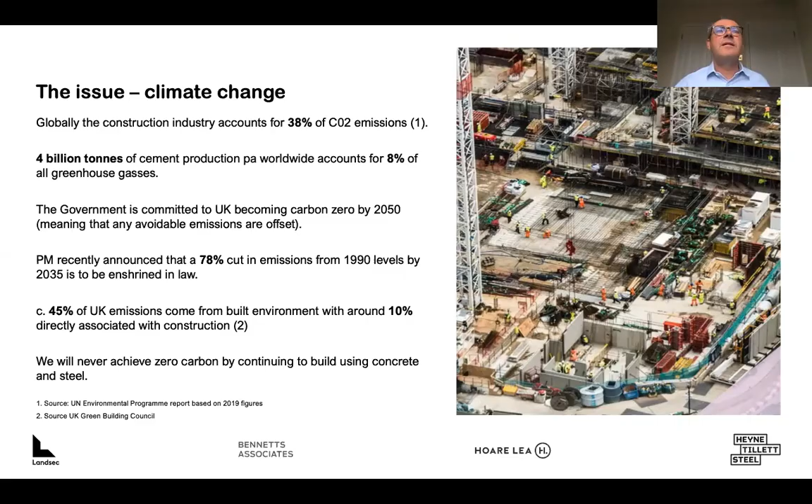Sustainability is already embedded front and centre in our thinking at Landsec. Last year, we refreshed our purpose and core strategy, and underpinning this is our commitment to be sustainable. We understand the issue, and we embarked some time ago on a process to ensure that all our developments will ultimately become net zero carbon in line with the targets we've set ourselves. This is our key focus and links with our other two core purposes: connecting local communities and providing our customers, partners and people with the best platform to realise their full potential. Next slide, please.

Our sustainability strategy is divided into three core areas: creating jobs and opportunities, using natural resources efficiently, and sustainable design and innovation. For each core area, we set ourselves clear and stretching targets. Next slide, please.

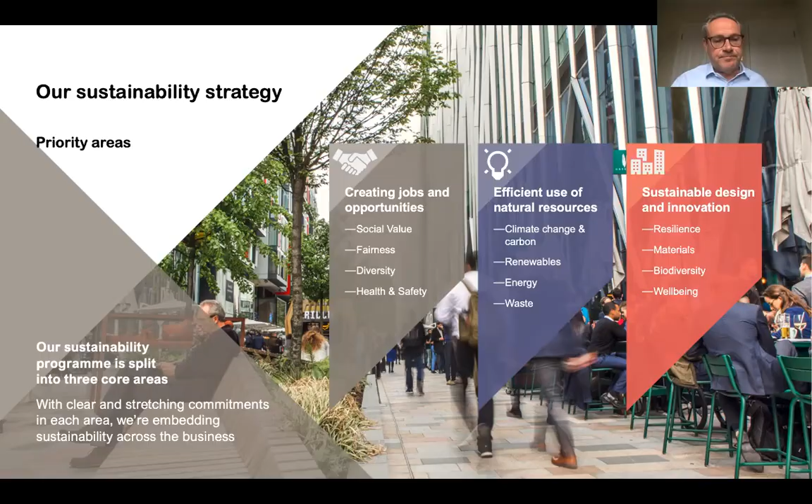Our credentials as a sustainable developer and property owner have become widely recognised. In 2016, we became the first commercial real estate company in the world to set a science-based carbon reduction target, which was to reduce carbon intensity by 40% by 2030. And last year, we achieved this target 11 years early. So we've set ourselves a new target of a 70% reduction from a 2014 baseline by 2030. But whilst we're seen as an industry leader on sustainable development, there's always more that can be done.

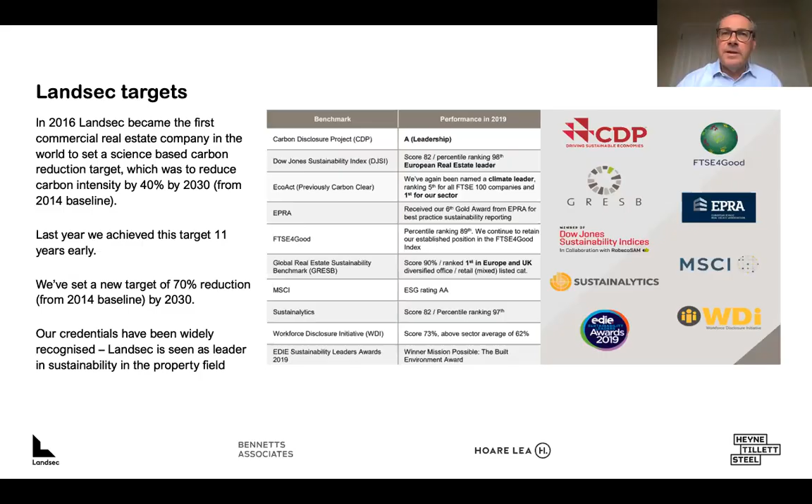Next slide, please. So why are we doing all this? Well, put simply, because the drivers for sustainability are intensifying all the time. And these drivers are from four main quarters. Firstly, investors. Financial institutions are demanding that companies take action on climate change. Between 2012 and 2019, there was a 60% increase in ESG funds, and this is only going to grow going forward. Investors are looking to follow companies that do good as well as make a profit.

In terms of our customers, 126 of our existing customers and many of our potential occupiers have set their own science-based targets or made sustainability commitments, and we need to help them meet these. By offering a building that ticks all the net zero carbon boxes, they'll avoid the need for costly changes to their plans when tighter restrictions come into place. And more directly, a JLL report last year indicated that sustainable buildings command a rental premium of between 6 and 11% across central London, and they also let very much faster.

Overall, in terms of employees, employees want to work for businesses that have the same values as them. 75% of employees interviewed by the Edelman Trust Barometer last year felt that businesses could be a force for good whilst also making a profit. And 2/3 of the public want to buy products that stand by their values.

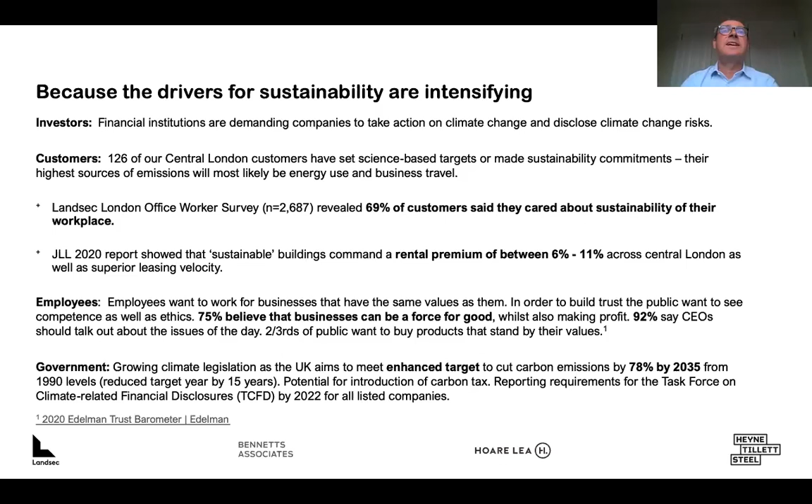Next slide, please. So we've identified 5 key steps to achieve net zero carbon. We aim to reduce operational energy use in our developments, purchase renewable energy, use an internal price of carbon to drive investment towards cleaner alternatives, reduce construction impacts through clever design specification and repositioning our assets, and also to offset remaining carbon for non-renewable energy use.

To implement these steps, we have a sustainability brief, which we give to all our customers across all our developments. Signing up to our sustainability and community charters is a normal part of our process. Next slide, please.

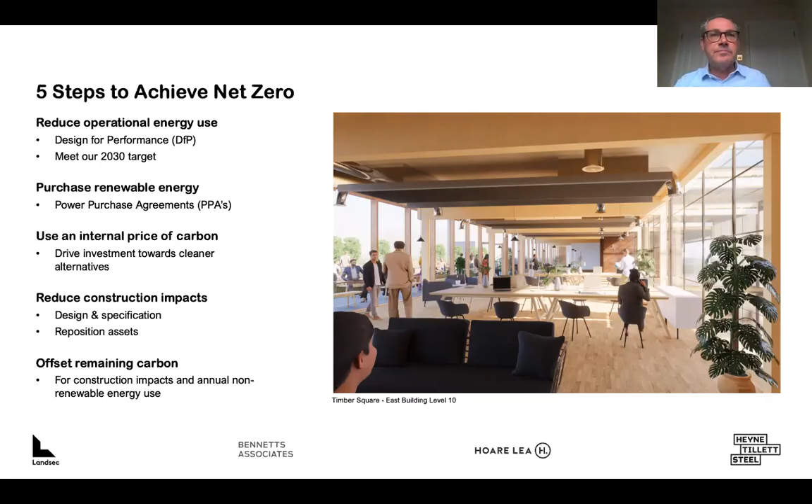So for Timber Square, we selected a professional team who demonstrated a high level of expertise in sustainable design and asked them to come up with a scheme that responded to our net zero carbon aspirations and targets. The brief was focused on 4 main requirements, and these were to minimize embodied carbon from construction by building light and dry, retaining as much of the existing structure as possible, to minimize energy and carbon in operation through specific design of a zero carbon scheme with minimal energy demand, by delivering a human-centric design that embedded natural elements within the scheme and promoted physical activity through the building, and finally to deliver a resilient, lasting design, a strategy and a design that would allow the building to be adaptable to future uses and climates.

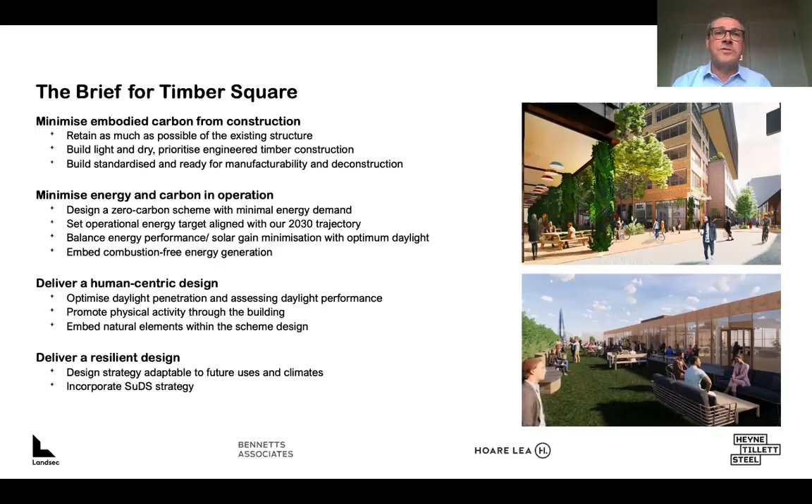Great, thank you very much, Rob. And so now we're going to hear about how the brief has informed the design and how the team has worked collaboratively to focus on a human-centric, low climate impact workplace, as well as a well-connected public realm. And so I'm very pleased to introduce Peter Fisher. He's the director at Bennetts Associates. And of course, Bennetts have been leading the field really in sustainable design since the 1990s. Peter.

Thank you. Next slide, please. Rob has started by outlining the brief, and I have to say, in all of the years that we've been working on projects of this ilk, the brief that we got from Landsec was the best one that we've ever received, and it was the best one because of its simplicity and its clarity. The sustainability brief was actually a single sheet of A4 paper with clear targets on it, and I think importantly, a clear understanding of the ramifications of some of those things.

And I think one of the bits that most excited us was a combination of an emphasis on reuse and timber, and also a line that always stuck in my mind, which was visible and reversible structural joints, which implied to us that Landsec understood what the ramifications of that might be. And Rob has run through the brief that we were given, and I think we took away from that a number of factors on sustainability. I think the key items were around climate action, particularly science-based targets, the resource use and circularity, and an understanding of what that implied, but then also health and well-being.

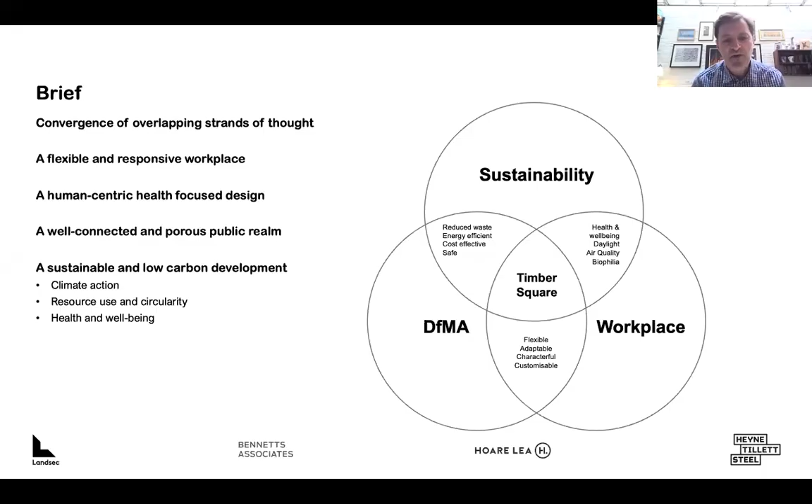And I think the bit that really crystallized for us was a convergence of several different strands of thought around sustainability, the changing nature of the workplace, and also the way that we constructed the project, design for manufacture and assembly. And we're at about 85% DFMA working with Laing O'Rourke. And we were very interested in the intersections between these different facets and how they mutually reinforced and supported each other. The next slide, please.

So just quickly looking at the location, it's in Southwark to the south of the Tate, with the more established Bankside, if you like, to the northern side, and then Union Street and railway arches to the south. So it's quite an interesting area that's overlapping between more vibrant areas and more established ones.

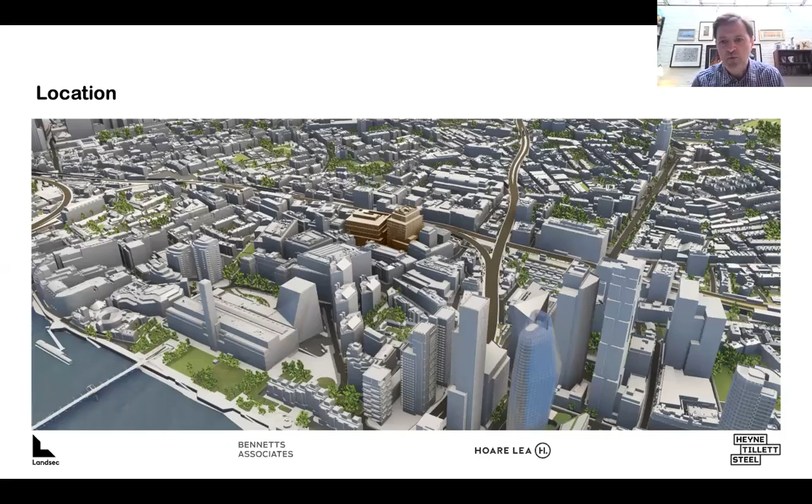And then on the next slide, this just begins to describe some of the very key design moves that were made. And starting from the left-hand side, there's an existing 1950s print works, which is incredibly robust on the site. And we've been able to retain about 85% of the structure of that. So we're removing some areas that are illustrated in pink. Retaining that building and combined with the hybrid structure means that the number of truck movements is almost half what we'd expect with a scheme of this scale ordinarily.

Then the print works is being extended as indicated in blue, and then there is an entirely new building which is slightly taller. The buildings are roughly the same size in scale. And between those, that then creates quite a large area of public realm facing south and against the railway arches. And then one of the most important features, I think, of the building expressively has been roof terraces and balconies. Virtually every floor has access to several roof terraces, and there are 4 major roof terraces, 2 on each building.

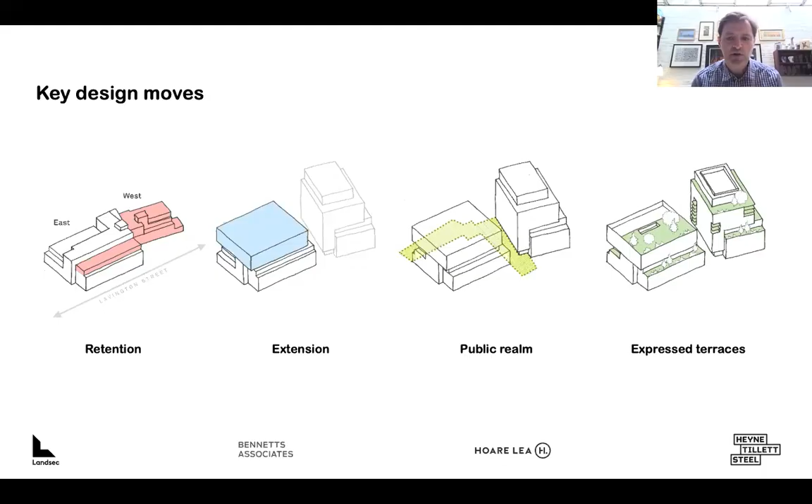And then on the next slide, this is then the images cutting through the 2 main buildings. You can see on the left-hand side the refurbished and extended printworks, and then the entirely new ink building, as it's called. One is an atrium building, which is a virtue of the existing building itself, and then the other building is a centre core. But both of them are built with a timber hybrid structure.

The most important factors, I think, on reducing energy consumption and embodied carbon across the building have been, and Dee and Francis will go into a lot more detail on each of these, but design for performance was extremely important for the project in enabling us to optimize the facade ratios, to have very good daylighting, and that morphs as we move around the building.

And then on embodied carbon, as said, the use of the existing building, the hybrid structure using steel and CLT, but then importantly, I think one of the most important bits has been very, very detailed measurement of that. And the project runs what we've called a carbon VE tracker, which runs along the cost VE tracker. It's done in exactly the same way. So that is tracked all the way through the project at each DTM.

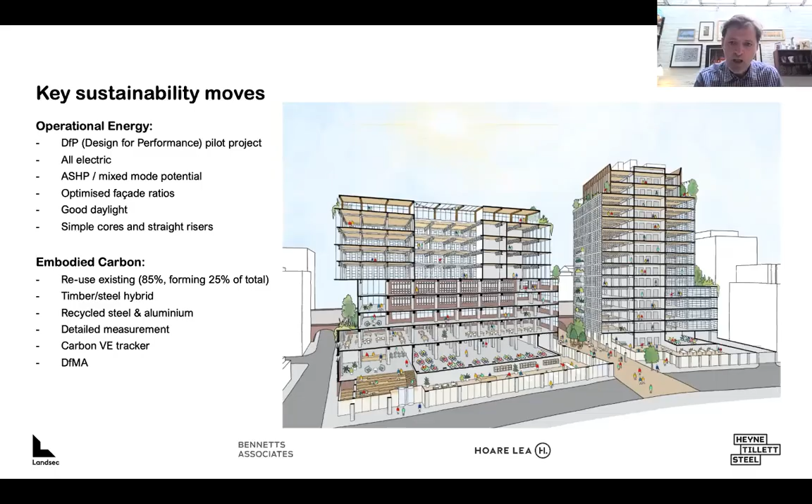And if we move on to the next slide, this is then showing the way in which the DFP model was really used to try and optimize the facade ratios. And these change quite significantly as you move around the building. And it leads to some results that, I think, conventionally are perhaps slightly surprising, in that we have very, very high glazing ratios on the northern portions of the building.

So they're approaching 80%. And then the modular format of the cladding allows us to begin inserting solid, translucent, and even potentially in the future opening lights within each of those areas. And so that morphs as we move around from 80% to 60% on the east and west facades, and then at the upper levels of the south facade that changes to 40%. So it's been very important for us manipulating glazing ratios as we move around. And then if we move on to the next slide, please.

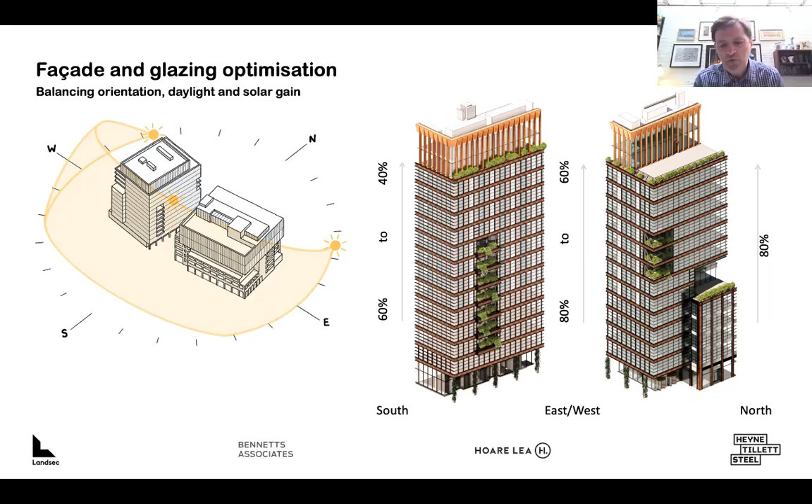This is then beginning to show the structure, which Dee will run through in a lot more detail, but it's broadly the same across the two buildings. The existing building is much deeper plan, so it's got taller floor-to-floor heights and a much lighter weight steel structure. And between them, the two schemes are roughly between 20 and 25% lighter than a more conventional building would be.

And there are no ceilings, it's all exposed surfaces within there. And there's very much been an attitude of materials being self-finished. We're exposing the structure, we're exposing the structure of the cores. So as much as possible, it's been removing material.

And it's surprising things such as suspended ceilings that you would ordinarily have in such buildings. That can be about 10% of the overall embodied carbon of the project. So there's been an emphasis on reused, self-finished and recycled materials and low VOC materials, which leads to a palette a little bit like the one that is indicated here.

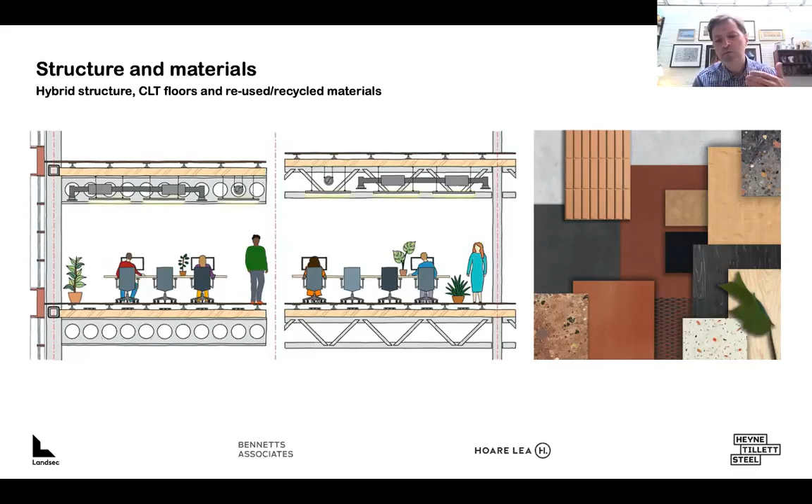And I think if we move on to the next slide, which is then some of the internal views of the project, I think that part of what excites us as architects is not just exceptional carbon accountancy, if you like, and reducing the carbon impact of the building, but that emphasis on reuse, the idiosyncrasies that sometimes come with reuse, and then the range of different spaces that you get, from the image on the top left of this, which is one of the main floor plates with the steel structure and the CLT planks all exposed, to entirely timber structures towards the top of the buildings, and then some of the reuse spaces below.

I think you get a much greater spatial diversity and a material richness, and just an enjoyment that comes out of this that is significantly better than office buildings that were being designed 10 or so years ago.

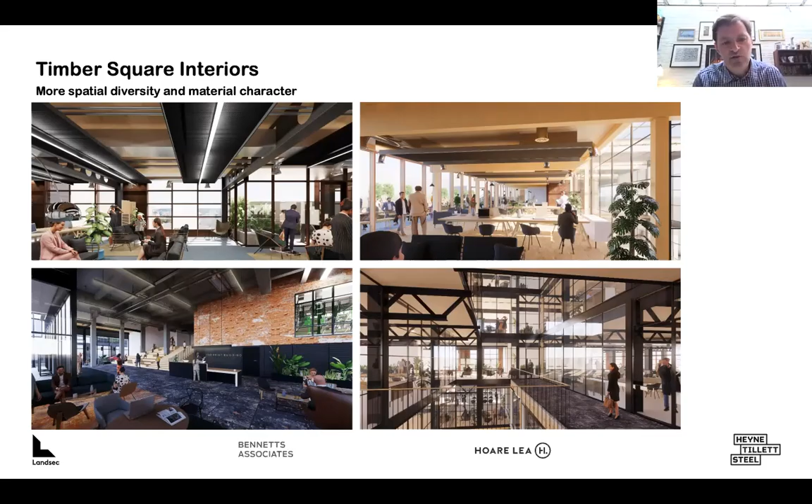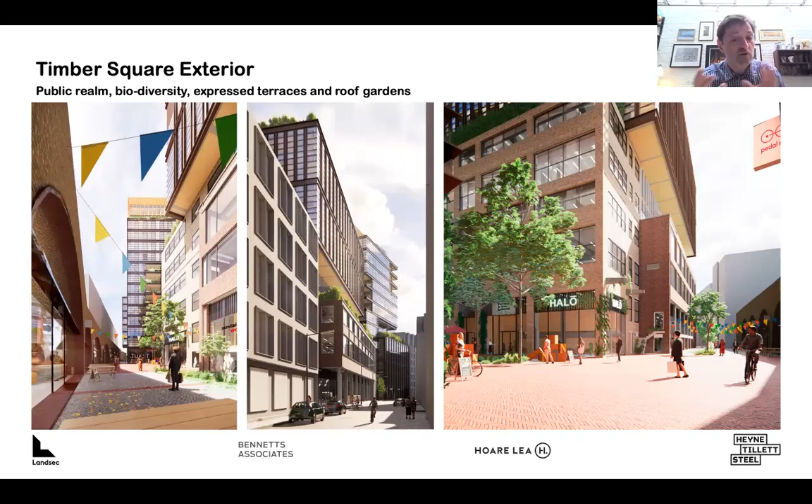And then if we go to the next and the final slide, this is just showing some of the external views of the scheme, the public realm at the lower levels, the railway arches, and then the facades on the new buildings, where it's actually not that easy to detect the way in which the glazing ratios are altering as you move around and up the building, but they are there, and you can also see some of the terraces and the balconies on this.

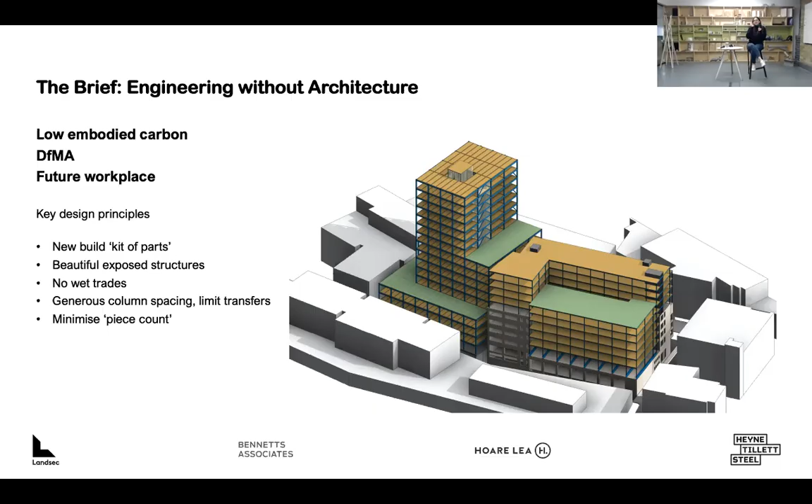And that really influenced our key design principles that we set out at the start for the scheme and our project. The image that's on the screen at the moment was from our first interview with Landsec. And looking back on it, it's really nice to see that a lot of our initial ideas are still in the scheme today. Next slide, please.

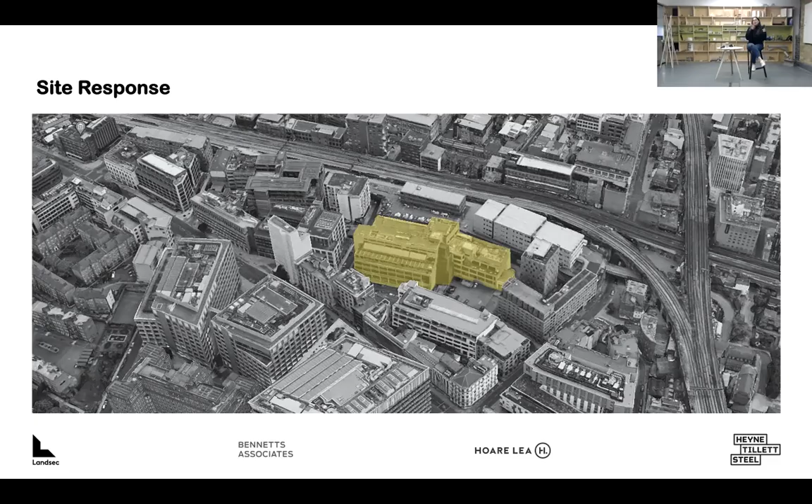So the most sustainable thing to do would obviously be to retain all of the existing buildings on the site. But our initial site appraisal showed that there was one quite small, poor quality building on the site, and one other fantastic building that had a really generous structural grid and great floor to ceiling heights. And that's really where the refurbishment and then new build structure came from. Next slide, please.

So the existing building structural grid is 6 by 12, and we needed to come up with a structural scheme that was going to work with the long spans and also be lightweight to keep the load on the existing structure to a minimum. Concrete was going to be too heavy and also really tricky to modify. And the long spans didn't really suit a glulam structure, as the beams were going to be really large and we were requiring additional transfers. So quite quickly, we honed in on the steel and CLT hybrid solution.

The west building actually really suited the same structural grid as the east. And so we ended up with a really similar kind of structure for both. The 6 meter spans really worked with the efficiencies of the CLT, and the steel suited the long spans.

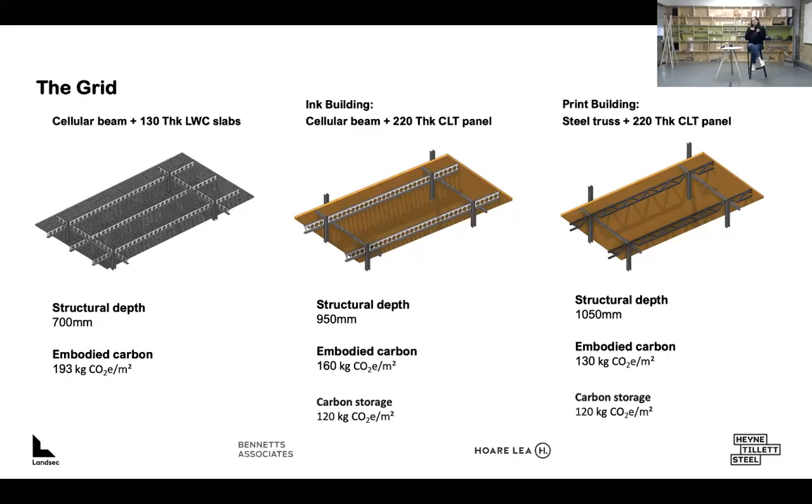Next slide, please. Oh, I should say on that slide, those were the final solutions that we came up with. On the ink building, we ended up with cellular beams, and then on the print, we had slightly deeper, really efficient steel trusses. Next slide, please, Molly.

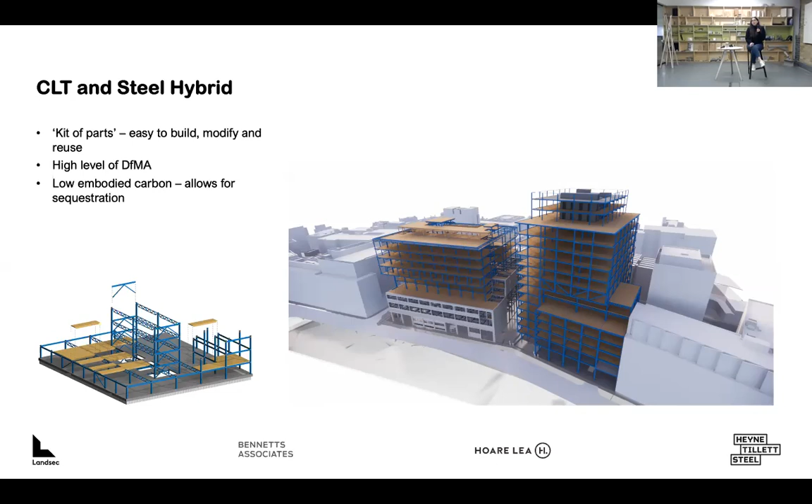Thank you. So the steel and CLT hybrid really kind of met the key design principles that we had set out at the start of the project. It was essentially a kit of parts which was easy to build, modify, and reuse. It offered really high levels of DFMA, and it had a low embodied carbon, particularly when compared to a traditional composite structure, which we were using for our benchmarking. Next slide, please.

So like any refurbishment project, at the start, it's really important to thoroughly research and investigate the existing building to build up a detailed understanding of the structure. We were able to prove that the existing building had been designed for really high imposed loads, and we were kind of able to influence the design of the new superstructure and grid to really work with the existing structure and minimize the amount of strengthening to the frame and foundations.

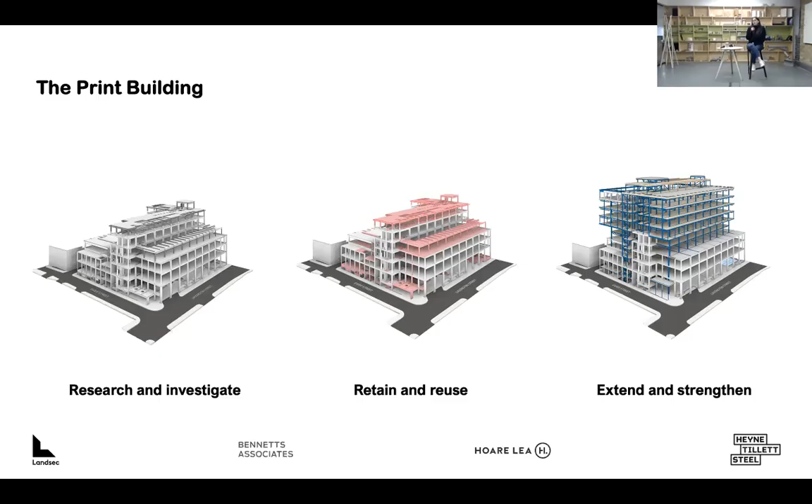The approach to the print building has really been, as Peter said, to retain and reuse as much of the structure as possible. And we've actually been able to keep over 85% of the floor plates, which is very good. By limiting the amount of significant alterations to the lower floors and retaining as much structure as possible, the print building has ended up with a really low embodied carbon rate. And that's really helped to offset the much higher cost of the ink building when we're looking at the development as a whole. Next slide, please.

So I think we all know that to be really sustainable, you want to avoid a new basement. And we did look at that initially on the ink building, but it was not going to be viable. So instead, we tried to make sure that the substructure design was as efficient as possible. The good ground was at a depth of a double height basement. So the basement was set at that level, and we used a piled raft solution, which really minimized the amount of piles that were needed.

Early stages, we looked at a lot of different options for the stability on the ink building. And we did start out with steel perimeter bracing, which allowed a soft core to be used and really offered a lot of flexibility. But as the design progressed, we moved towards a concrete core. And this is now going to be formed in twin wall to really maximize DFMA.

Early contractor involvement was really beneficial on the project, and understanding how the steelwork was going to be procured really allowed us to target VE opportunities for the steel frame. Working with the fabricator, we actually identified that there was 320 tons of BOF steelwork, which has a higher embodied carbon rate than EAF steelwork. So reducing that and working on other VE opportunities on the steel frame, we actually reduced the embodied carbon of the steel by 750 tons on the ink building alone.

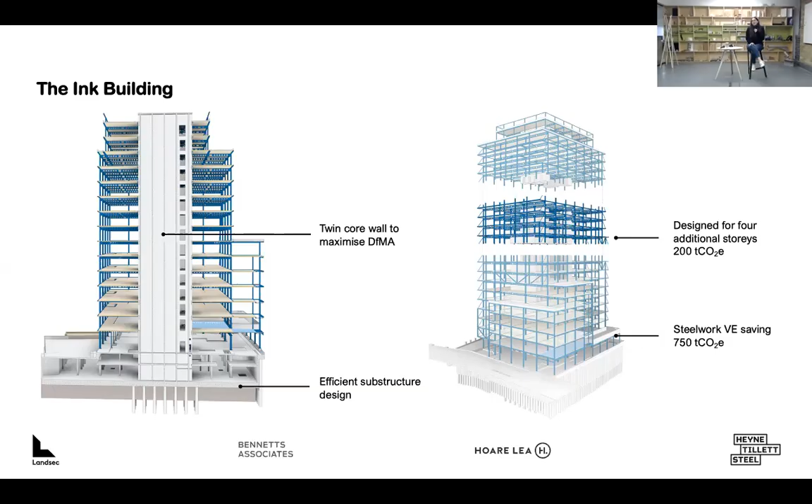The ink building has been designed for 4 additional stories. That's come at a cost of 200 tons of carbon, but offers a lot of future flexibility, be that adding floors in the future or changing floor construction, and is actually only 2% of the total embodied carbon for the building. Next slide, please. So this graph shows the embodied carbon per meter squared of the structure.

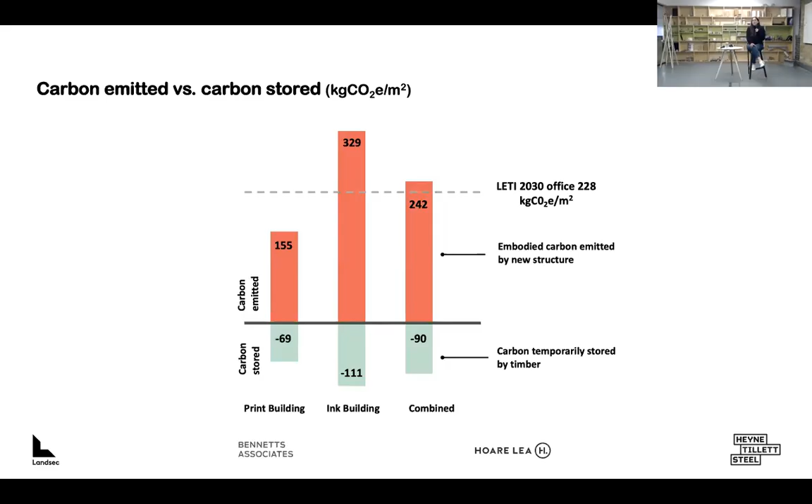As we said earlier, the print building's got a really low rate, and that's owing to the amount of structure that we've been able to retain. The West building is a lot higher, but actually that figure is really good for a new build high rise with a double basement. And when we combine those buildings together and consider them as a whole, we're just above the LETI 2030 target for structure. And we've kept sequestration below the line. So actually, if we were able to include that, we're sitting below that target. Next slide, please.

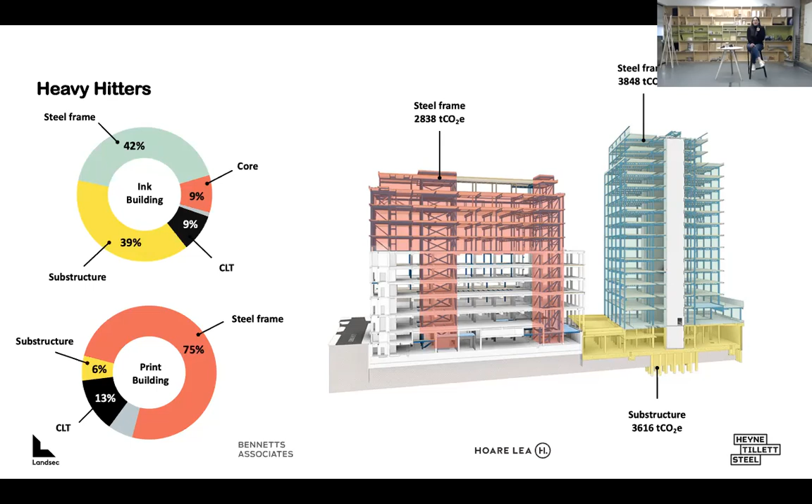And on that plant related note, I'm going to hand over to Hoare Lea and Francis.

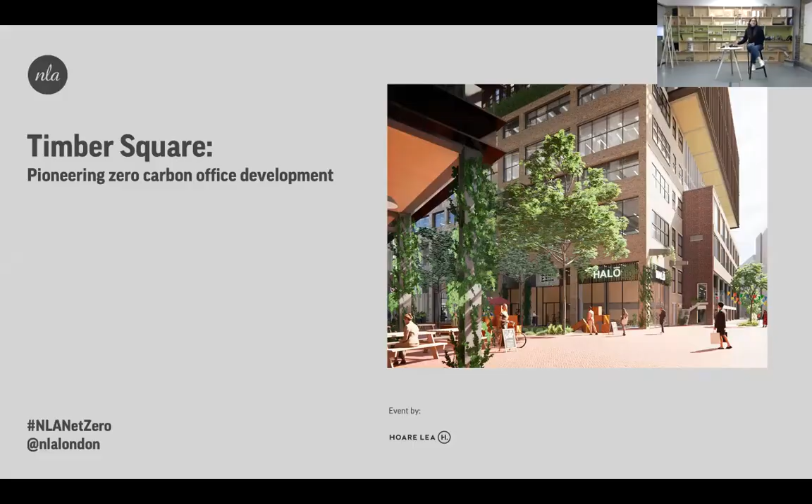Thank you very much. And now our next speaker, as you said, is from Hoare Lea, and we've got Francis Brown, who's a senior associate and who's going to summarize the approach to design for performance and reducing carbon through the whole project lifecycle. Francis, over to you.

Thank you, Peter. So Hoare Lea have got a wide range of responsibilities on the project, but for the sake of this, I'm focusing on the operational energy side, and then a little bit about enabling CLT. So for Timber Square, next slide. For Timber Square, we've used a design for performance approach.

So Design for Performance is an industry initiative with the Better Buildings Partnership that aims to improve the energy performance of the office sector in the UK by setting energy targets in energy consumed per square metre per year during the building's actual operations. And that's the important point. Whilst we're talking about the modelling we've been doing during design, this is really about what it's actually going to do and be measured to do later on.

So we've undertaken advanced energy modelling so far. So this is far beyond the Part L requirement for modelling that's traditionally done during the design stage, so to better understand how the building will actually perform. So this is to help us to make decisions that will have real impacts rather than what we perceive to be something that's going to improve.

So you can see on my slides here, I've got an early stage model and then a detailed model. This is just to show how the model exists from the start, and it's the same model, but it gets evolved. So we don't just evolve the geometry, but we also, as we develop the systems and make decisions about how we're going to control them, that information goes into the model too.

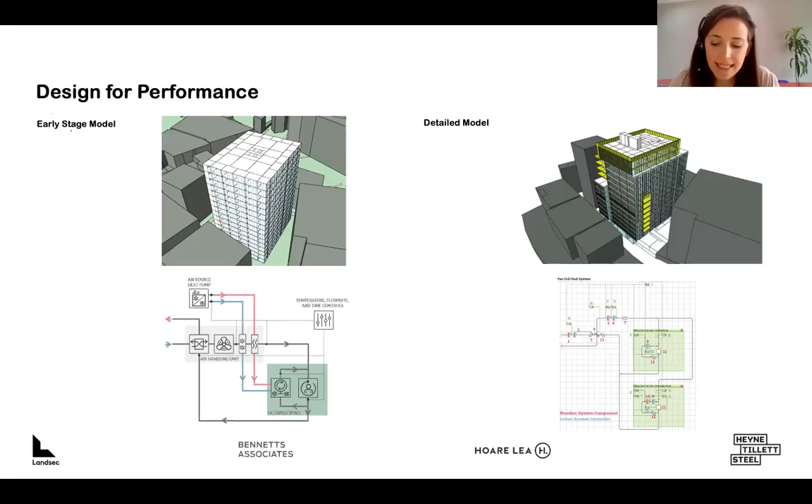So I'm not going to go into the MEP too much, but we did take a fully integrated design approach to develop the in-depth model. So that's with the modellers and the people developing the MEP design to establish the best approach. I mean, as in summary, the building, sorry, I should have said next slide.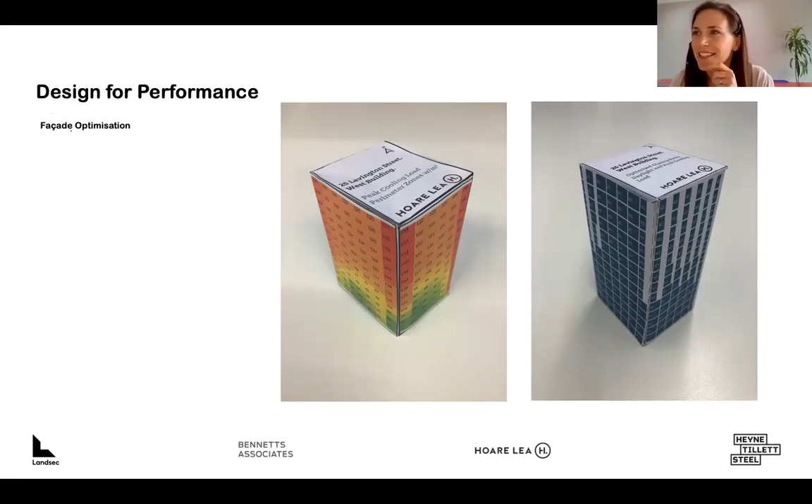The buildings are all electric in response to the carbon benefits. They've got 4 pipe air source heat pumps for each building, and heating and cooling to the workplace is provided through a fan coil system, which was determined through actually looking at all of the different parameters to see where the best energy performance came from. And although I think active chilled beams were a front runner for a while, once we looked at the different supply temperatures from the air handling units, that changed. So this is how we were sort of learning through this.

So after the initial facade study, here's a list of a few of the studies that we looked at. So different air supply temperatures and specific fan powers from the air handling units, the selection criteria for the air source heat pumps, comparison of chilled beams against fan units, as I just said, and also an option study for mixed mode ventilation. So that's to look at a future scenario. And actually the impact of specific controls regimes, which you would never have looked at before if you weren't doing design for performance. So some of that has actually made it into the descriptions of how the system should operate. And we actually found that these were all interrelated.

In addition to this, Landsec are also targeting high standards of health and well-being. So the modelling is also used to enhance that too, as I was talking about earlier on. Next slide, please.

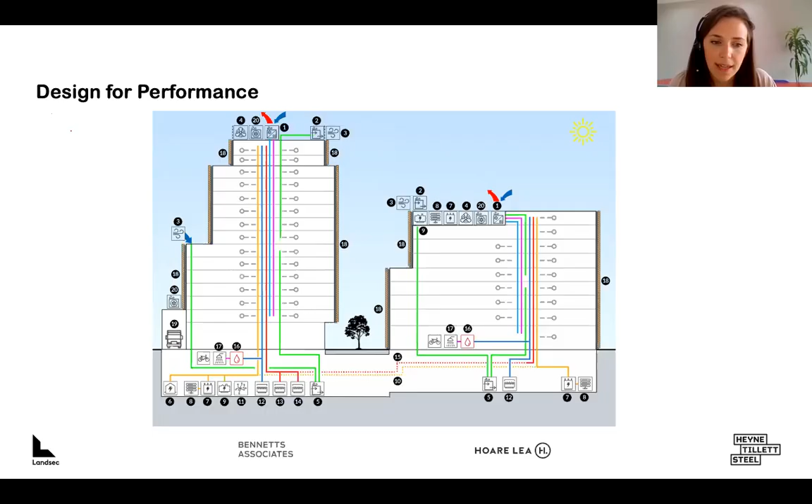So just to touch on embodied carbon, to support HTS and Bennetts in developing their approach to embodied carbon, Hoare Lea have been undertaking a thorough embodied carbon study at each design stage, and through stage 4 we've been maintaining a sort of VE tracker, so that we can keep track and make sure that design decisions are going in the right direction for embodied carbon rather than losing all the ground that's already covered. And as Dee already said, that's actually got better through stage 4. So to enable, obviously the biggest, next slide, please.

Obviously one of the key things that's been done in this project is the slabs being CLT. So from Hoare Lea's point of view, this offered a few challenges to help the design team get through. The 2 main challenges for Hoare Lea were acoustics and fire. So CLT, sorry, next slide, please.

CLT has different acoustic properties compared to the more traditional structures. Therefore, our acoustics team have undertaken detailed calculations and testing to establish what was needed to achieve the required standards. The solution proposed is to use high-density board beneath the floor to provide the acoustic density required. The design team have worked with the supply chain to establish a method for applying this whilst maintaining the overall buildability and cost. And that's led to a DFMA approach for this, with the acoustic board being integrated onto the CLT board before it comes to site. Next slide, please.

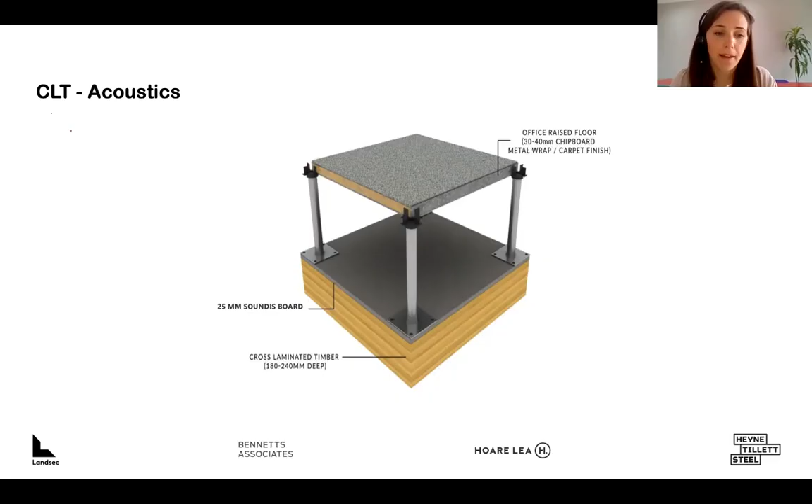So the other one is the fire, which is obviously the biggest concern for many people when you look at building out of wood. So this has been thoroughly investigated for this project. The principle of using CLT for these buildings is that the building maintains enough structural integrity in the event of a fire and therefore doesn't cause additional safety risk for the building occupants or anyone else. Hoare Lea's fire team undertook extensive modelling to prove that any fire would burn out on its own, with the CLT self-extinguishing before it's lost its structural integrity. However, due to what was at stake, it was decided that it would be best to build a mock-up and burn it to prove the calculations.

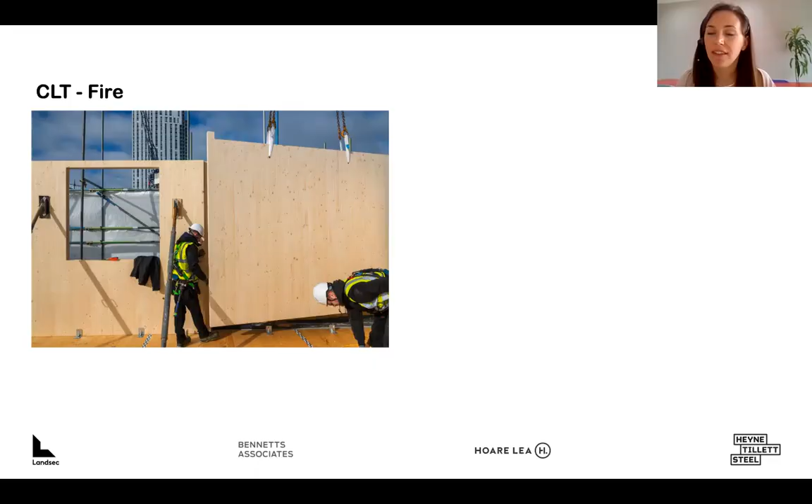So last winter in Lyon, this happened. Next click. So we built a mock-up and set it on fire. And then this happened. Next click. After 4 hours. So 4 hours later, without any external intervention to put the fire out, despite some local delamination of the CLT surface, the ceiling self-extinguished and the burnout was achieved. This provided evidence that the calculations were accurate and that the CLT solution proposed in this instance is suitable for use in these buildings from a fire perspective.

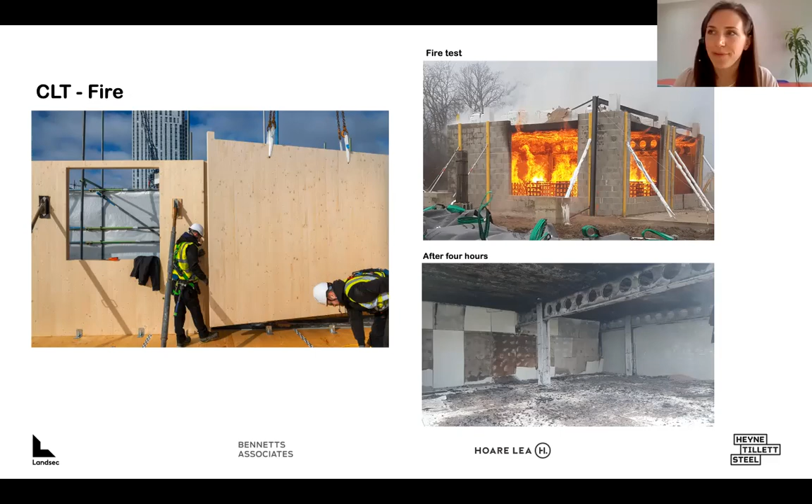Okay, that's me done. Great, thank you very much. Well, really interesting test there. So good to see that.